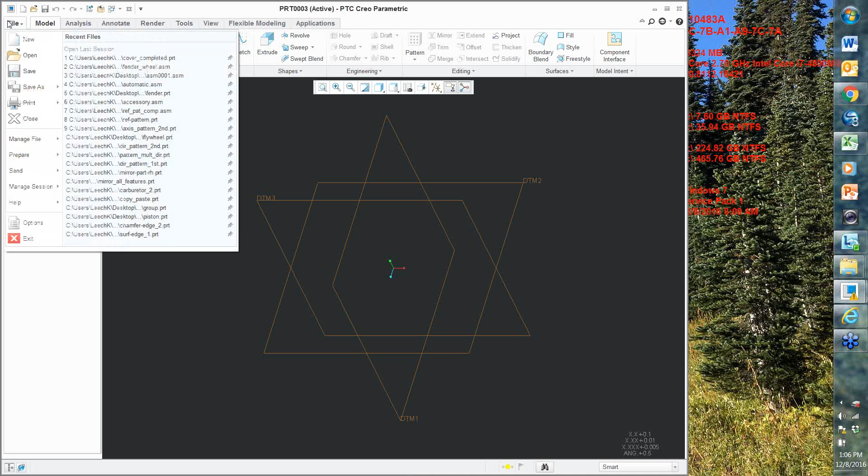So this is Creo 3. It's obviously an extra extension, one of the licensings that some companies will have or won't have. So I'm just going to start a brand new part here.

And I'm going to go about doing a cover. A lot of times with surfacing, you'll get an artist view of something or a JPEG. So I'm going to build this around some JPEGs on the premise that maybe somebody sent me these and said, hey, I need a cover to work towards this. And my job is to build that cover.

So I know that the cover is going to be 10 by a certain distance long, and I might want to even set up a little sketch in the background to give me some reference to some of these numbers. So I'm going to build a 10 by something here, rectangle. I did that kind of quick. I should have been able to get that symmetric, and I didn't. Big deal.

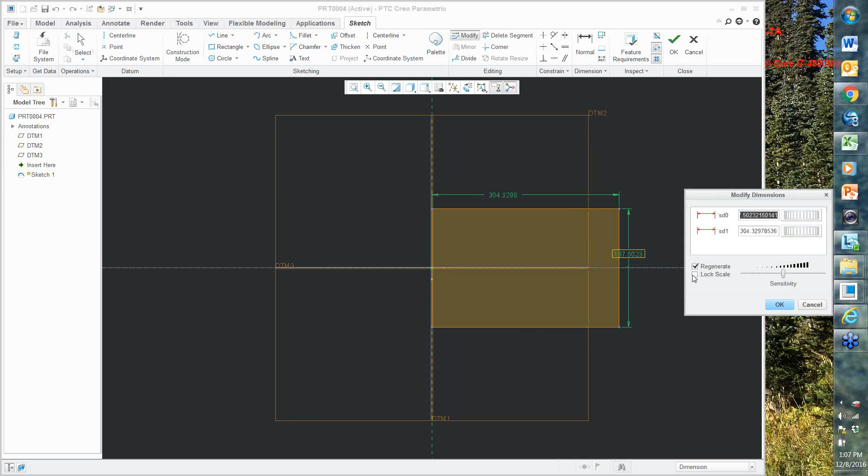Make that like 7 and 10. And I'm working in English units, in case you're interested. So I just got a little box for myself to get started here. I'm going to bring in those JPEGs. They're sitting in my directory. I got a couple JPEGs that somebody sent over that I'm going to build a cover around. That's why I put the grid there, so I have some reference to get a feel for how big this cover is going to be.

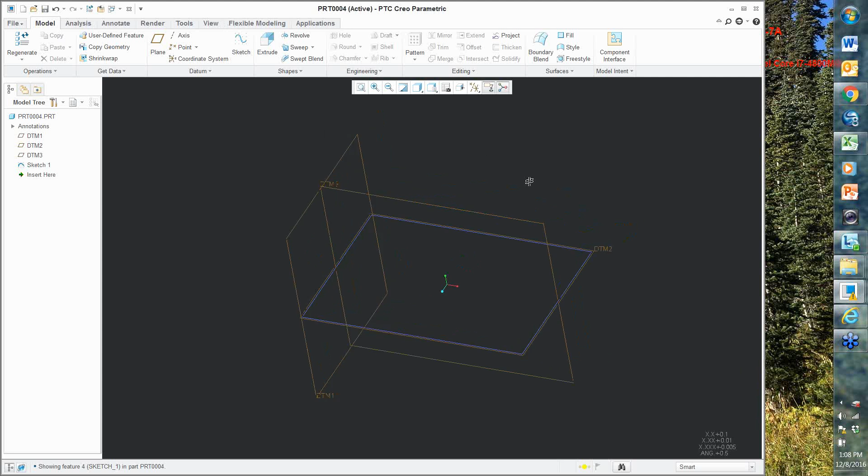And then the second part of this would be to build a cover for the backside off of the first cover. But today we're just going to do the first one. A couple versions ago, ISDX was the only way to bring in images other than putting them on a surface and applying them as a surface. In Creo, I'm not sure if it was 2 or 3, I think it was 2, they changed that and moved the images out of ISDX. It actually allows you to add those images in just a base unit of Creo.

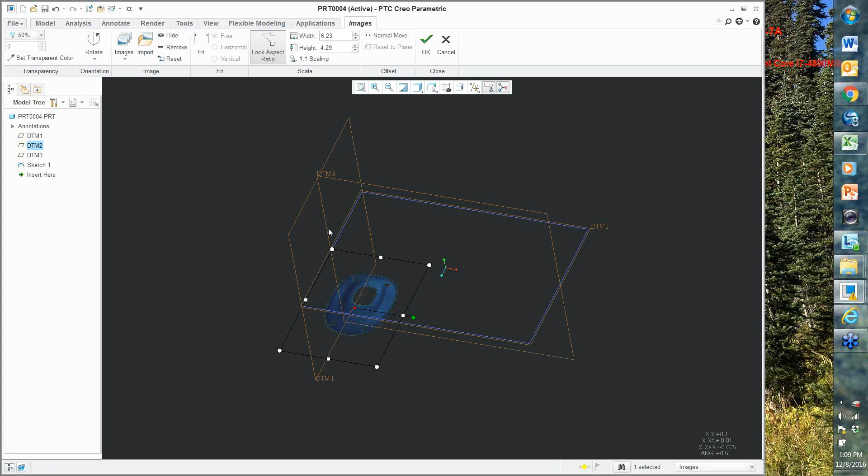So we're going to bring that in. I'm going to put an image on the front view. It's looking in my graphics library, which is not where those views are. They're actually in my working directory. I'm going to bring it in and start working on this. Again, I put the sketch in there to give me some reference. I'm going to bring this up and split this down the datum. So I'm going to rotate it. I wanted to go the other way, actually, so let's go left twice.

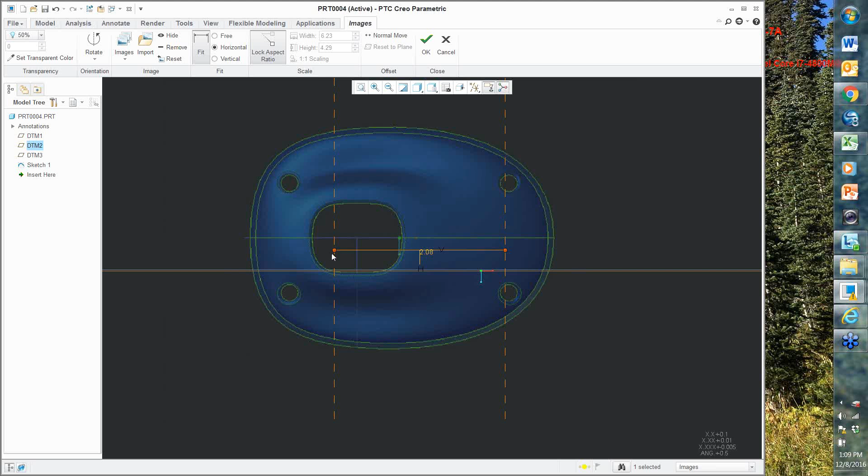I want to make this thing 10 long, and one of the things I came across a while ago is that you can actually go in here and say, I want to take this out, drag it out to here, drag it out to there, and I want this to be 10. Because that's what my grid was. I put the grid in at 10. This allows me to scale my image and get me started. All I had to do was uncheck that. I'm going to lay it inside my grid. That's a start. I'm in the center there. Not too bad. Good enough.

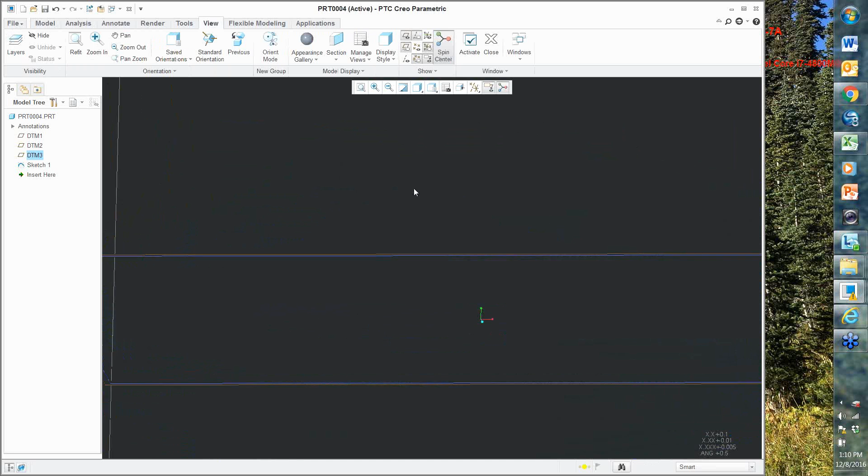Add another image. You can add more than one image at a time. So I'm going to import the second image here and put it on the middle datum. Working directory, that would probably be my left view. Go to the left side here. Front view. Talking and thinking is not my strong suit. Actually, that's the front view. That's the wrong image there.

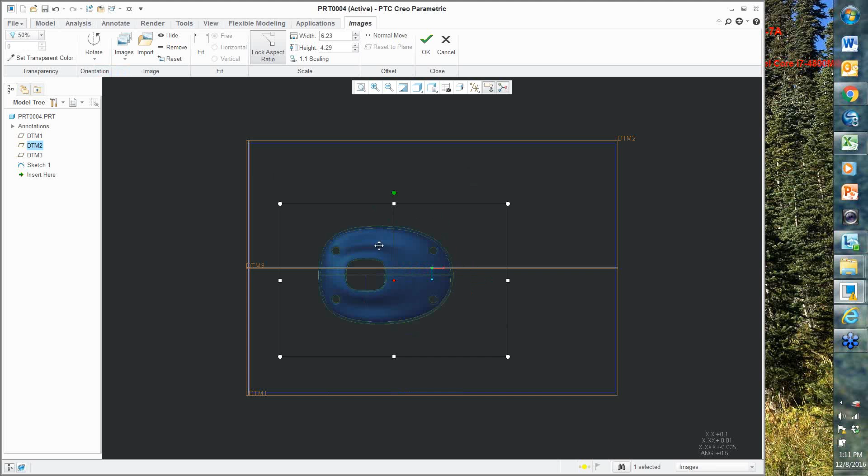Do that again. Display images. Import. I think I lost the original one too. I just bailed out of that. My bad. Working directory, top view. Just in case you missed it the first time, I get to do it again. Close. Good enough. Import.

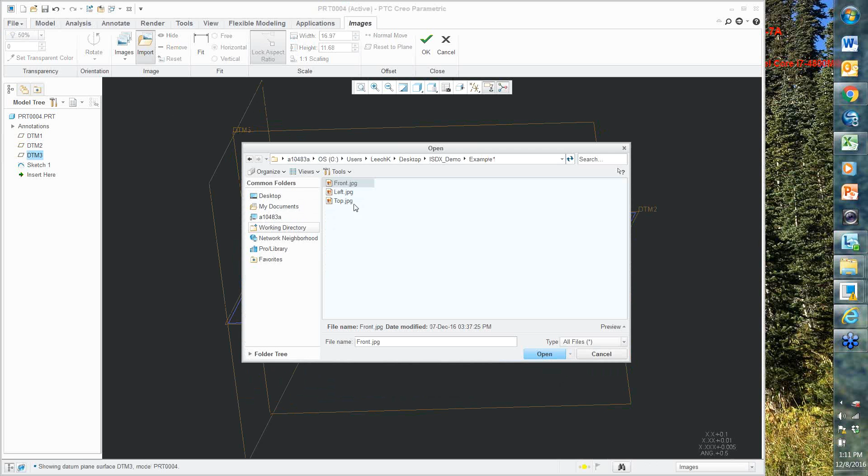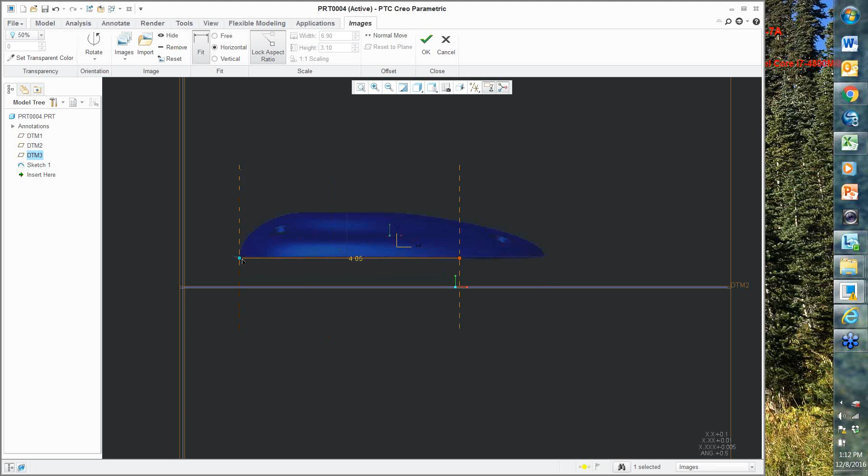This view. Working directory. Which one is which? Yep, that's the one I want. That's the better one. Front view. Bring that down. It's the same thing. I want to get distance here, and these are just going to be guides. I'm going to work my curves around them and play around a little bit. So I'm not looking for absolutes. I might be building the second half of this cover off of the first half, so this is just the starting point.

And that's not too bad. So I just brought in some sketches that I'm going to work around to kind of build my part. So that's not part of style, that's part of everything, and I could go and build solid models off of these sketches too. So you can use the sketch technique regardless of whether you're doing ISDX or surface modeling or solid modeling, it doesn't matter. But we're going to do some ISDX.

So this style feature, and I also find this too, when I go out and visit customers a lot of times, they're not even sure if they have ISDX, but if you click on the style feature and it doesn't tell you to go see your sales guy, then you've got the license. So sometimes it's been built into some packages and it's available and maybe you just didn't know it.

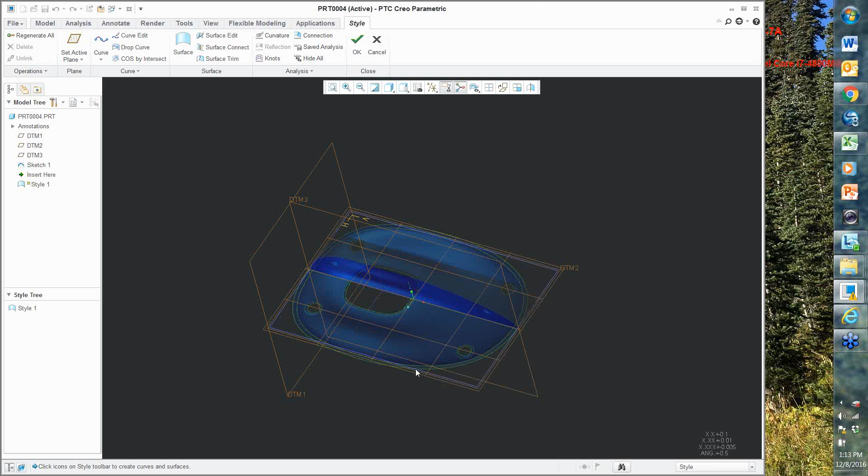So style, what's nice about style is that you can build your boundary curves and your surfaces all within a feature. And the typical thing within surface modeling is your model tree can get really crazy. So this surface technique style brings some of that together, gets a little more organization to your model tree. It gives you some extra tools that you might not have had, like the ability to work multiple screens at the same time. You can orient the models, so you can look at them in different views at the same time.

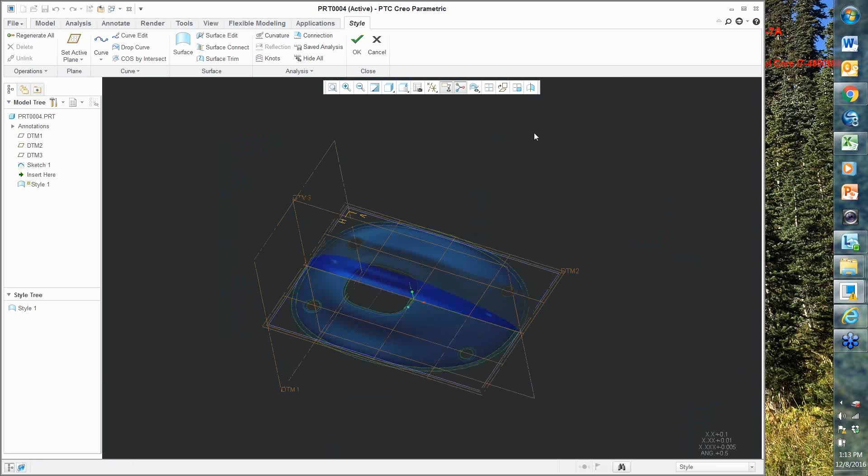I work on a laptop all day, so I tend not to do this multi-view thing because I got limited space anyway. But it's just a click of the window, and you can do a couple other things with that, but I tend not to do a bunch of it. So I'm going to start working on my curves first, right? Typical surface modeling, got to build the curves. So I'm going to build the curve around the bottom and some other curves.

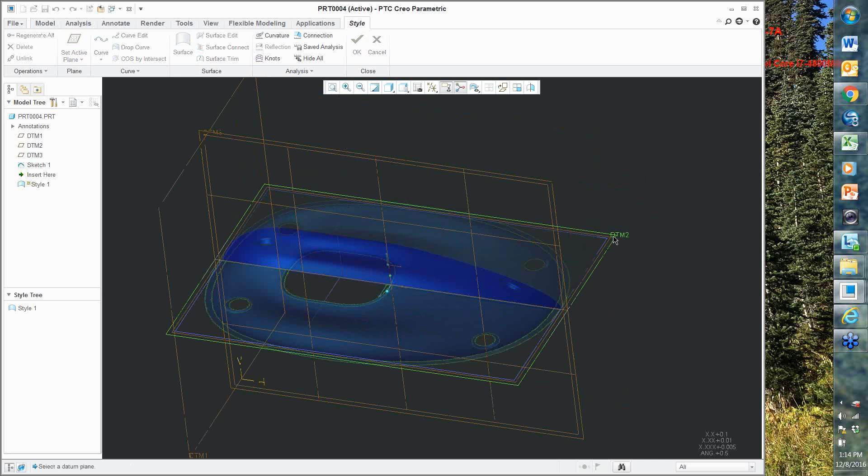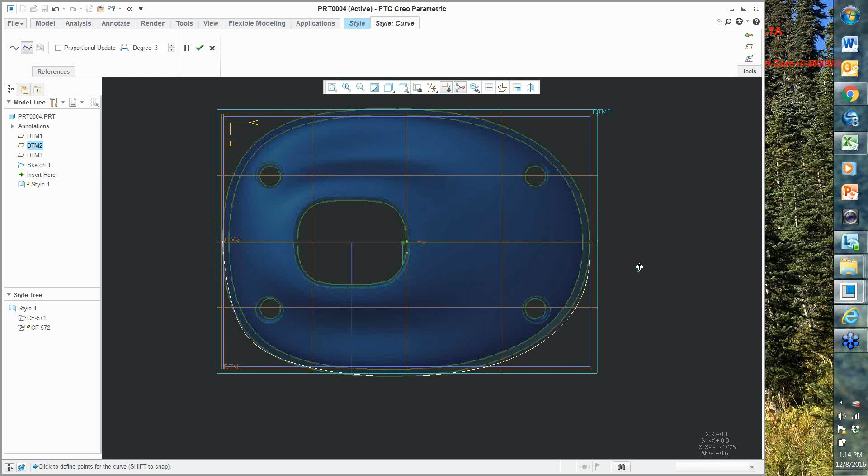You have to set your active plane, so one of the clicks here is active plane orientation. Well, I actually have the active plane set correctly, so I was kind of skipping that step, but basically it's just set it, pick the datum you want, right click active plane orientation, start building a curve. Right, a free curve or a curve tied to the plane is what I'm looking for. So I'm going to build a plane curve and just shift, grab the datum, and I'm building splines around this shape.

So once I get done with that curve, I can go back and double click on it and I can adjust it. And I didn't quite get that datum that I wanted, so I'm going to use the shift again and re-grab the datum. Drag it out. I have a little handle here that allows me to make that endpoint normal or whatever I want. So I actually want that to be normal to the datum. And I want the other datum here to be normal. Keep going back in there because I didn't really like the look of that.

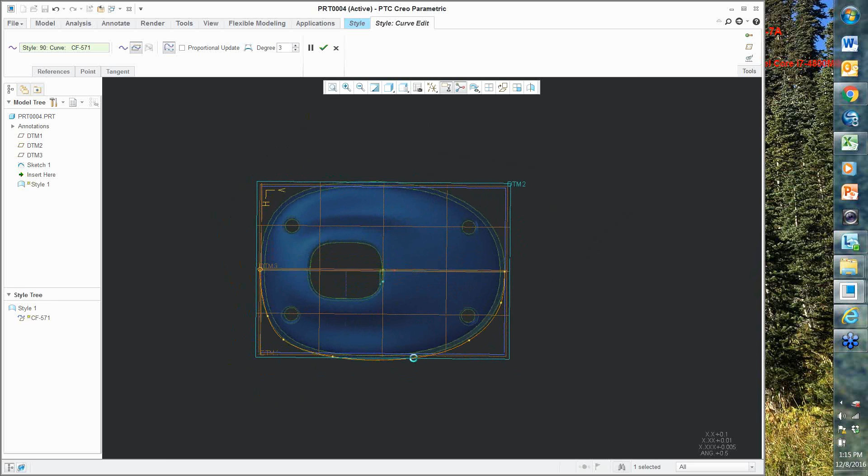You got to be careful too. I was playing a little bit earlier, so I've actually offset that by accident. It's just a matter of bringing that back down to 0. So we'll talk about that offset in a second because I will offset. Back to my orientation here, kind of clean my curve up, like that one. That's not too bad. I'm okay. I also want a curve in this to represent this top lip.

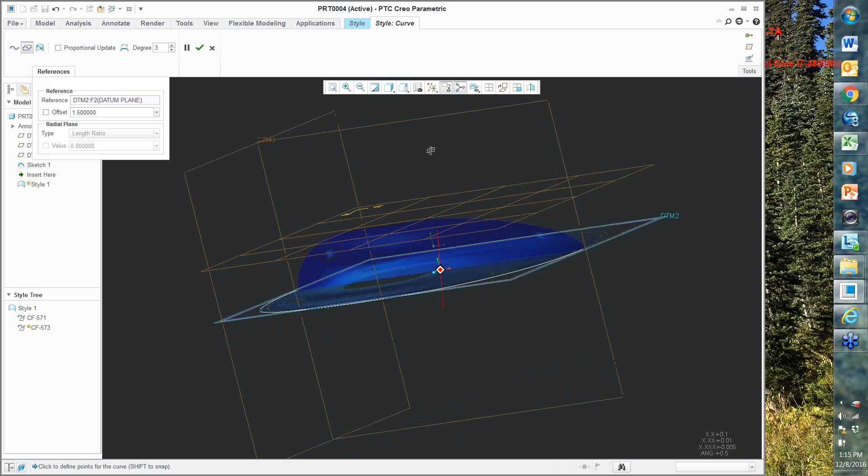So I'm going to make another one. But this is one I'm going to actually offset. This is, I don't know, like 1.5, pretty close, looks okay. Go back, reset my orientation, and draw the second curve here. So I'm going to build another curve by grabbing the datum again. I wanted to get a little bit closer, left click, click, shift.

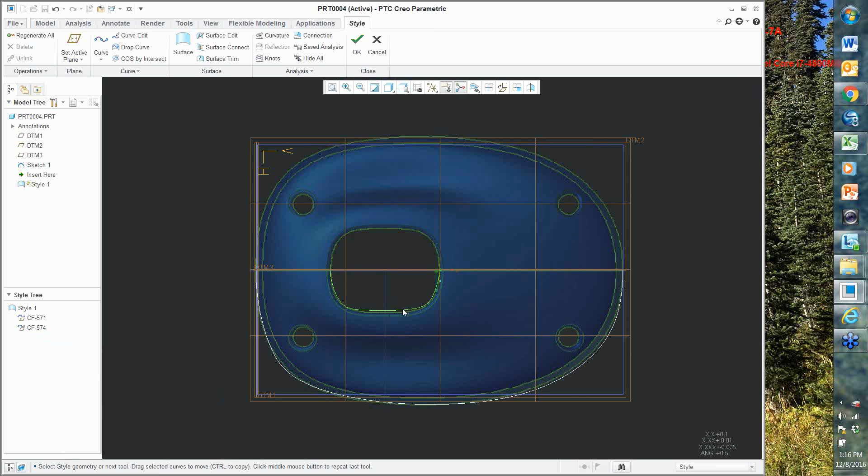Be done. I finished the second curve, go back in by right click and edit definition, or you can just simply come in here and double click on it, and then you can move your points, mess with your endpoint condition, make that one normal, this one normal, and I didn't finish that. You're going to go normal and then grab the datum. Do that again. Normal and grab the datum. All right. Bring that out. A little bit tighter here and clean it up.

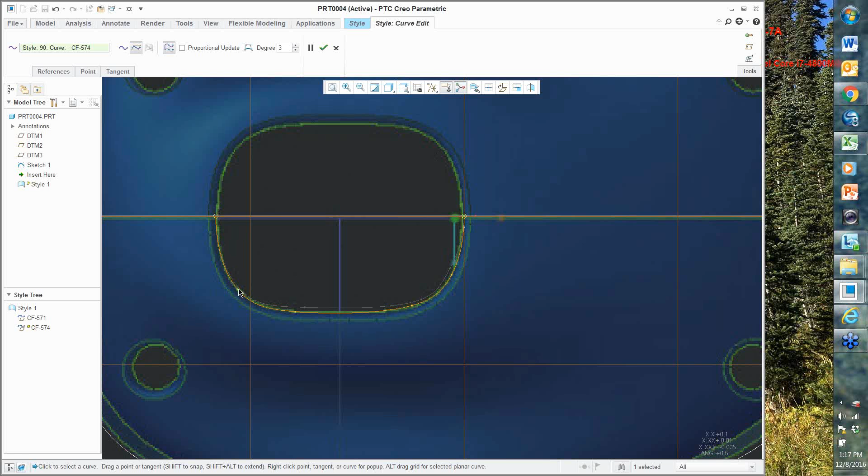So I like that. So I got two curves. I'm going to build side curves, and then I'll build a surface and then work off of the surface to build the second surface and thicken. And you kind of get the idea here.

So we're going to change the active plane. So we're going to set active plane to this datum. Now again, I offset that curve without actually building in a second datum. So it kind of saved me a step in there just by offsetting it. I could have built another datum and reset the active plane, but again, just little quick tips to make it a little bit easier.

What did I do? I started talking. I wasn't watching. I don't want to cancel. There we go. For some reason, I lost my active window there and got ahead of myself.

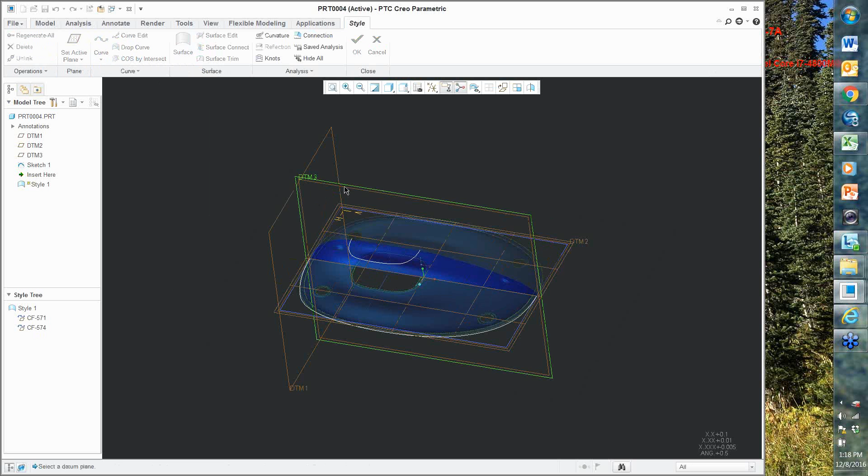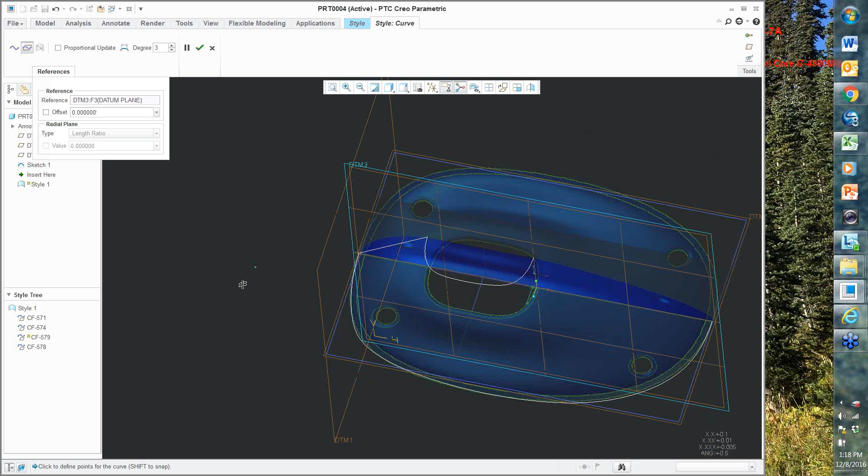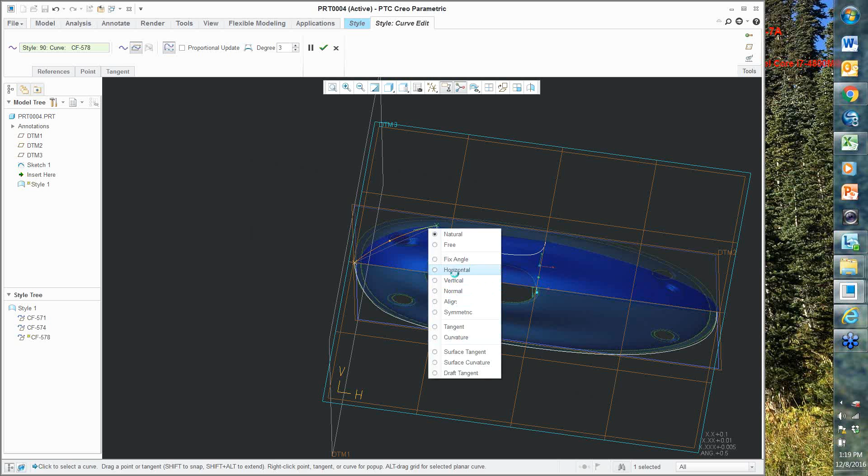I can go back into that curve. I can add a point by right-clicking on it and add a point or a midpoint. Right. I can control the ends here. So this would be horizontal. This side would be tangent.

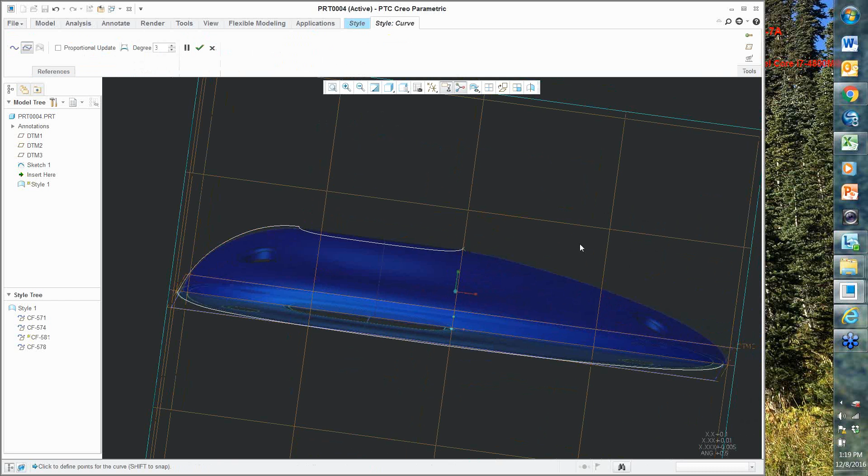You can drag them, you can manipulate them and move them, do pretty much anything you want there. Again, I'm kind of using that sketch in the background to kind of get a feel for that. Build my last curve. Make sure I get the active one to work. Stop the curve. Shift. That's going all the way to the wrong end here. Let me try this.

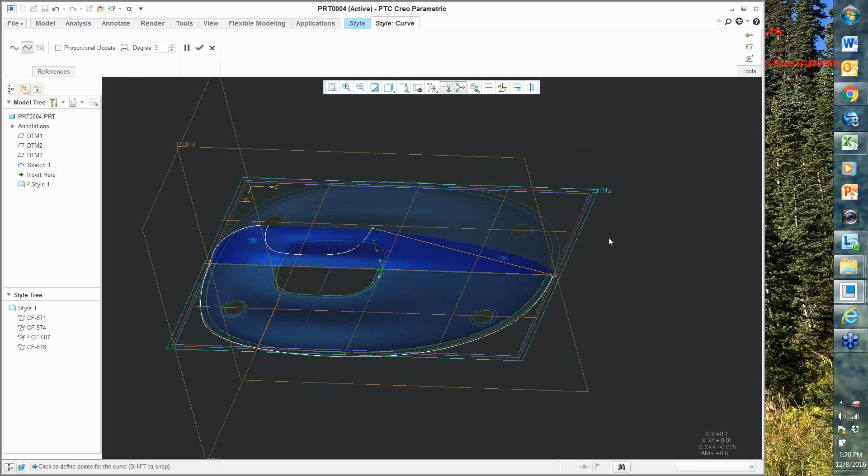What am I doing wrong? Pause for a second. There we go. I don't know what I was grabbing there. I was doing the same picks. I don't know if there's something with this GoToMeeting or not. But video cards, if anybody's familiar with Pro, video cards and these extra apps like GoToMeeting and things create some weird conditions. I don't really know what happened.

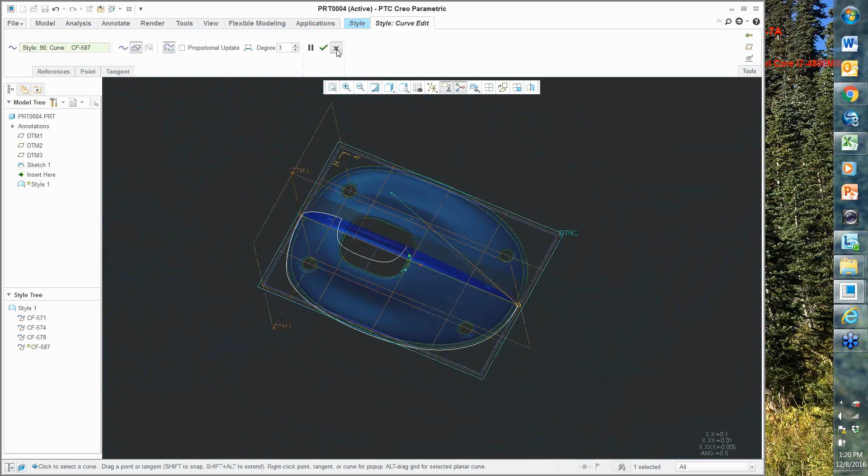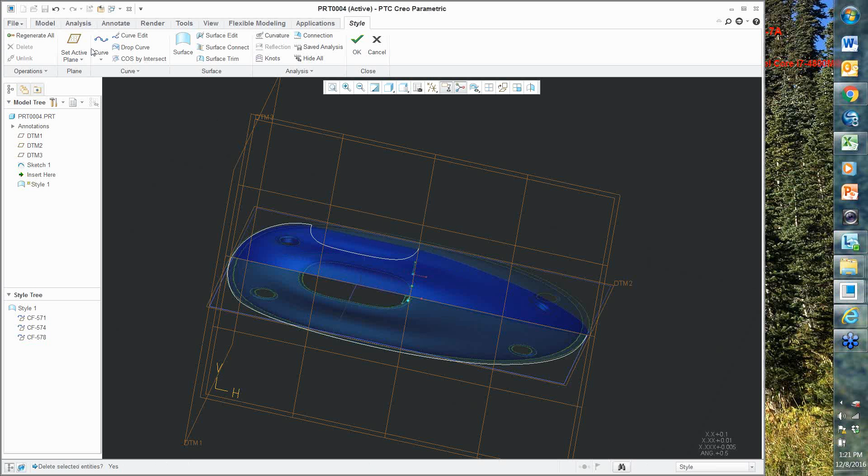Oh, I'm not even on that. That's what the problem is. So active plane. I'm going to lose my mind. At this point, I would normally probably go and restart my computer because I'm starting to get aggravated.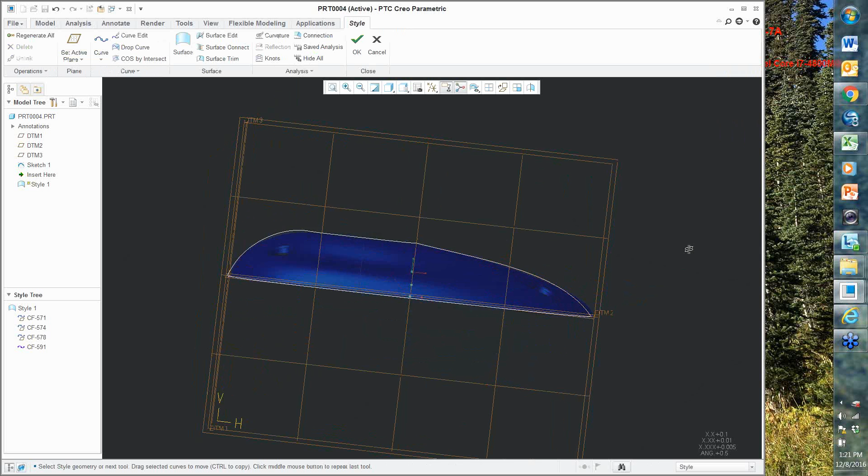Let's see if we can get a surface here, just to get an idea. So you can see I built 4 curves. I had to cheat the last one because, for some reason, it was going to the wrong end. Not exactly sure what's going on there, but let's see if I can get a surface. So there's my surface, and I'm thinking to myself, I probably should have put some side condition into this.

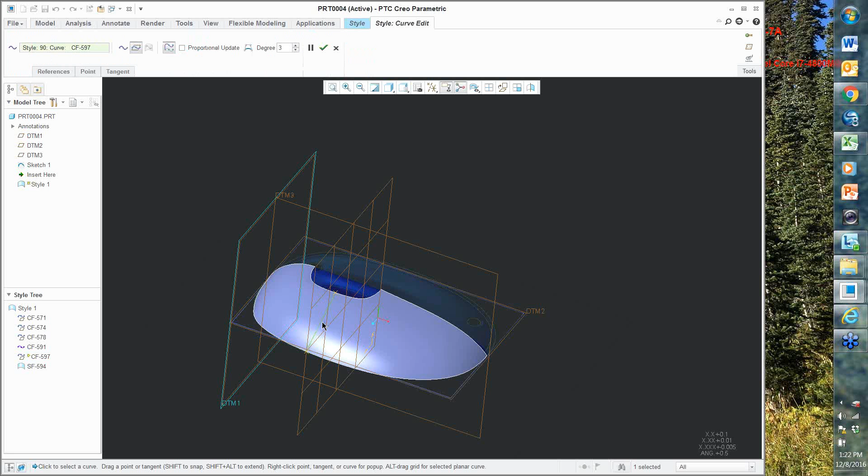So I'm going to reset active plane to this one, build a curve. I'm going to offset this curve somewhere, I don't know, 3.5. Go back, redefine my surface, add an internal curve to that, and it tied onto the surface. And then again, if you go back in, now you'll see that the surface is reacting to my little cross there. Right?

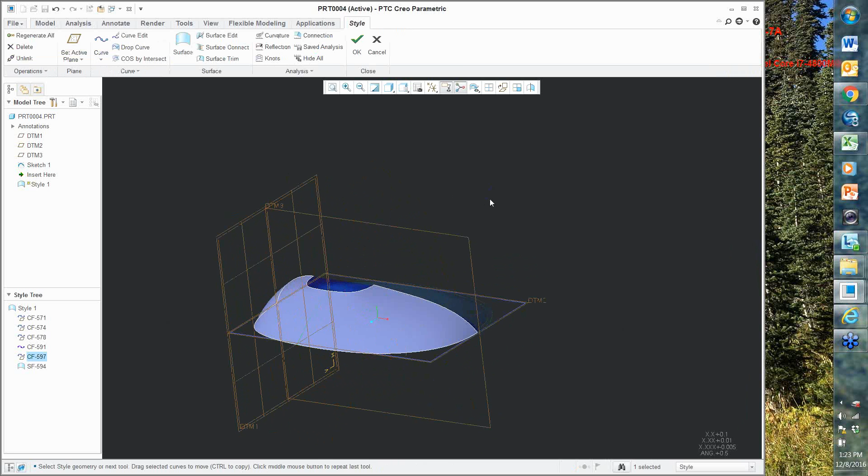And that would be the beginning. And you would take that and you would mirror it to the other side and thicken it. And so I got one that's already a step ahead because I got that free curve in there. I don't really want to try to mirror that. So let me mirror this other one here I had a little more time playing around with. Same concept, same curves, except this one I worked fine with the plane and I got the surface.

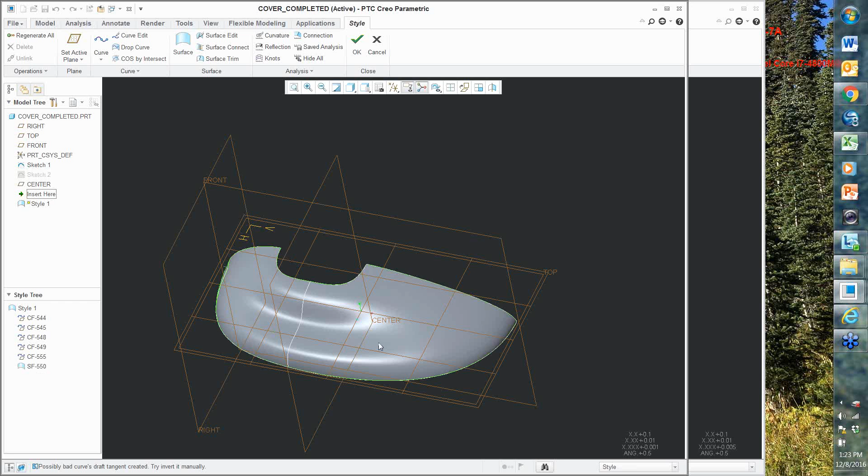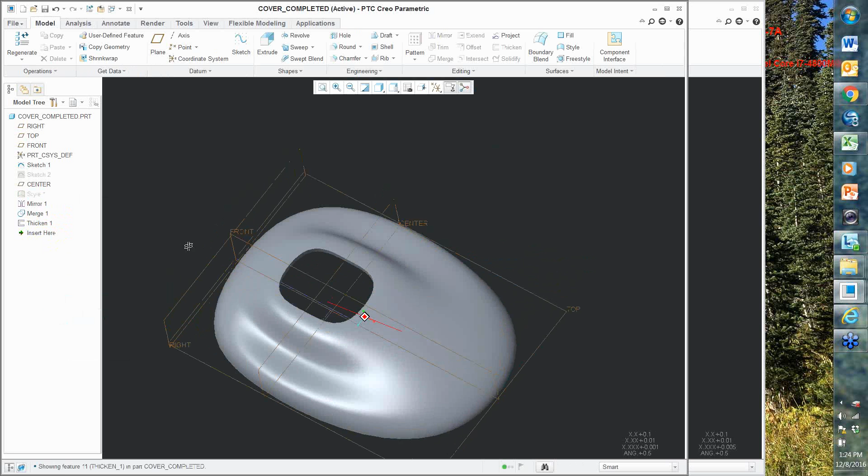Take the surface, mirror it to the other side. Take the 2 surfaces, merge them. Take that and thicken, whatever distance. Hide the style tool. And there's your beginning shape of your cover. Take a look at the surface. All right, so you're getting a really high-end surface there.

So that was just kind of a quick one; like I said, I had a couple issues there. I don't know, it was grabbing opposite of where I was picking. But that was the first little group that I wanted to do. The second one was the motorcycle example.

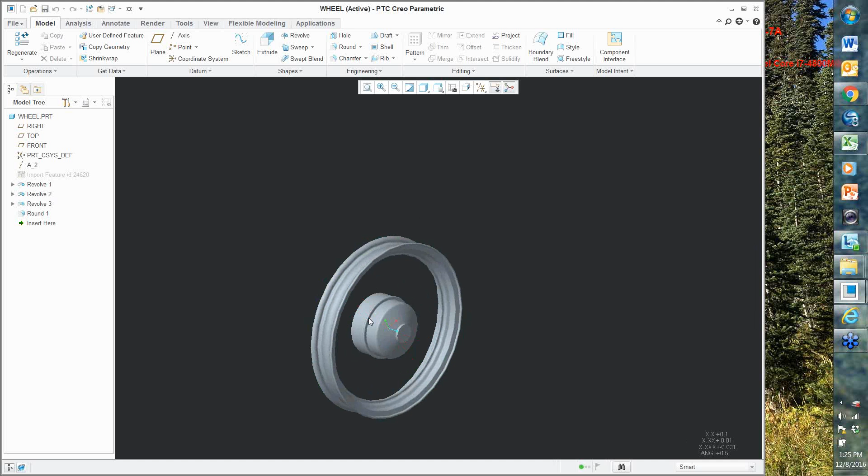So we have an assembly with some imported parts here, and we're going to build a fender, and we're going to build a set of spokes, just because they seem like kind of fun. So we'll do the wheel first. So how does ISDX come into a wheel manufacturing thing? Well, you can build the spokes very quickly. Same concept, using style. We can build a surface internal and pattern it around the hub there.

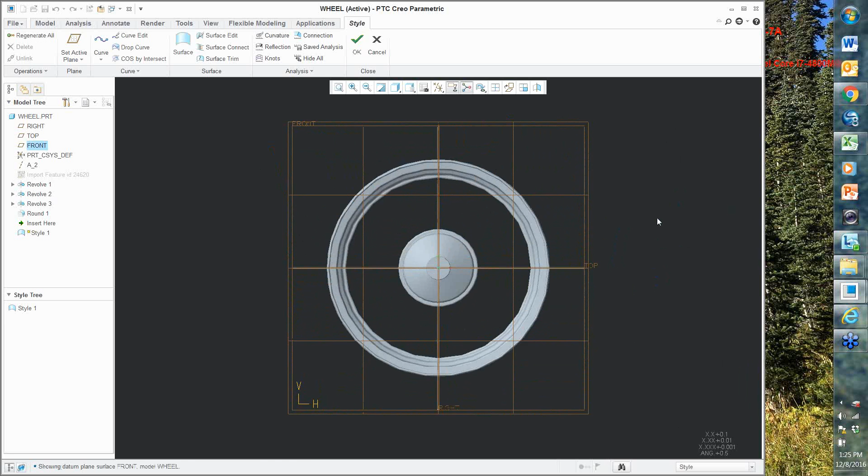So turn the datums on here. Let's go into the style tool. Set the active plane to be the front plane. Active plane orientation. We're going to go in and we're going to build some curves. Make sure we're at 0.

And we're just going to build a curve. We're going to start in here, and we're going to end up out there. We're going to build 4 like that. So curve, start here, end up there. So 4 separate curves.

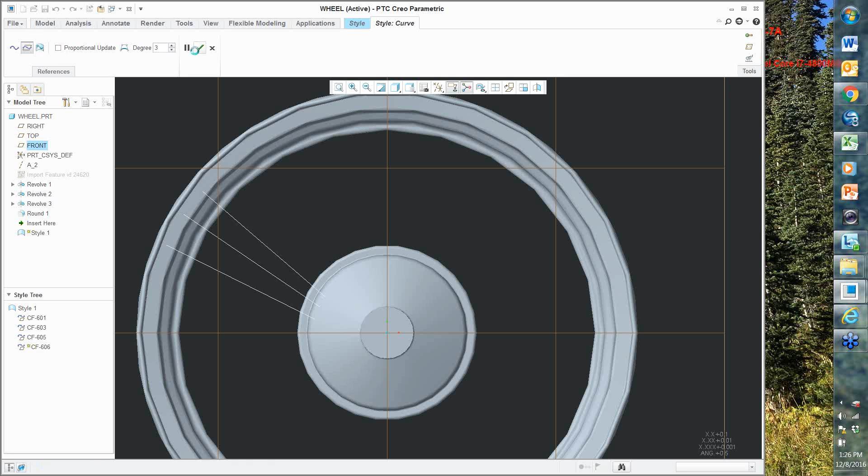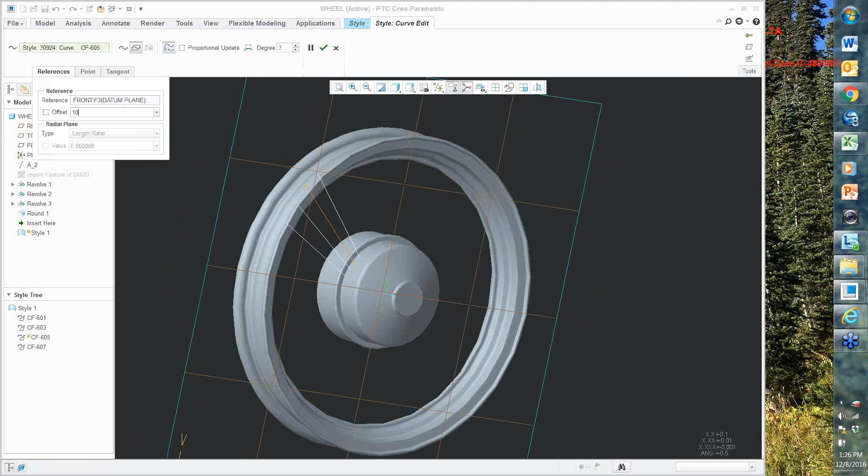They're all on that same plane, but I can go back. I can go back into those, and I can just offset them now that I put it in there. So I can go 10 to the front, right? So it's going to offset 10 one way. Grab the other curve, and we can go 10 the other way, so minus 10. So we built them all on one plane, didn't have to build a bunch of planes.

We can use them to build a surface. Control button. A nice little surface in there. And then we can use that surface to thicken. Didn't like it, a little too tight. Delete that and do it again.

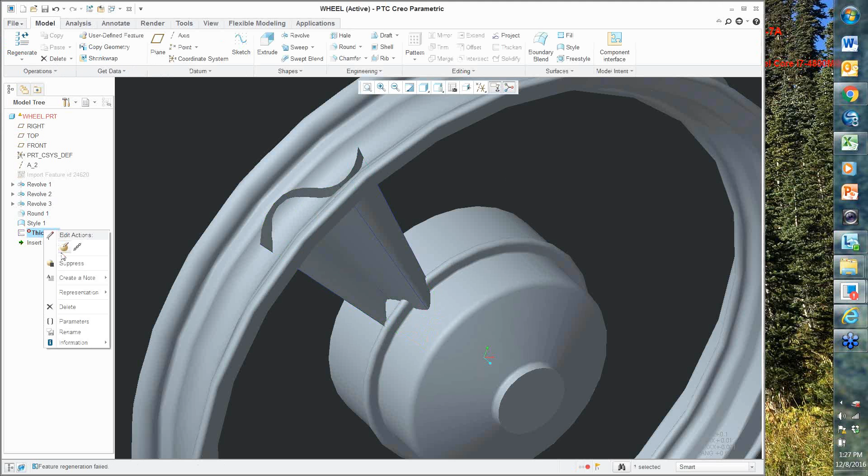Also want to add some style to this as well, right? So it came in as flat blades, but let's see if we can add a little style to these. We're going to drag these down a little bit more too. So I'm just double clicking on them to activate them. Definitely get a little bit of an overbuild here.

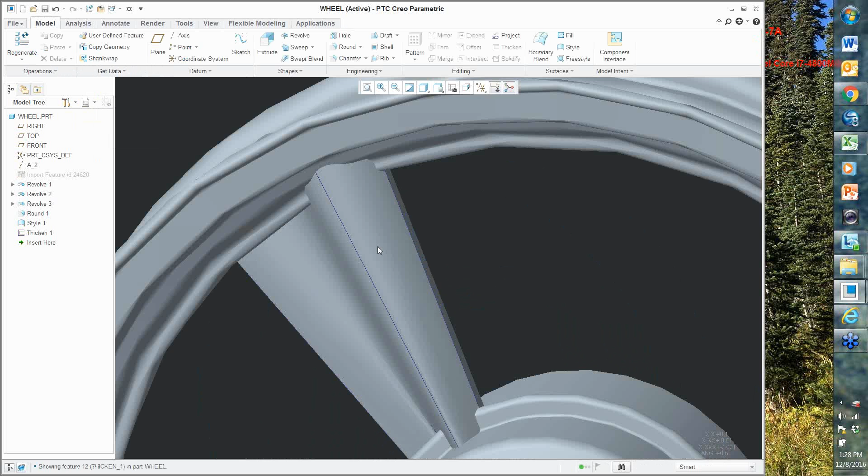So I'm just trying to get a style, so I'm not too worried about control fit or automatic fit in the thicken part there. So cheat a little bit. But we can go back into this. One of the reasons why I did it this way in the first place is it really gets you the ability to say, you know what, I'm going to have a midpoint, and I'm going to give it a little bit of a curve. And the midpoint.

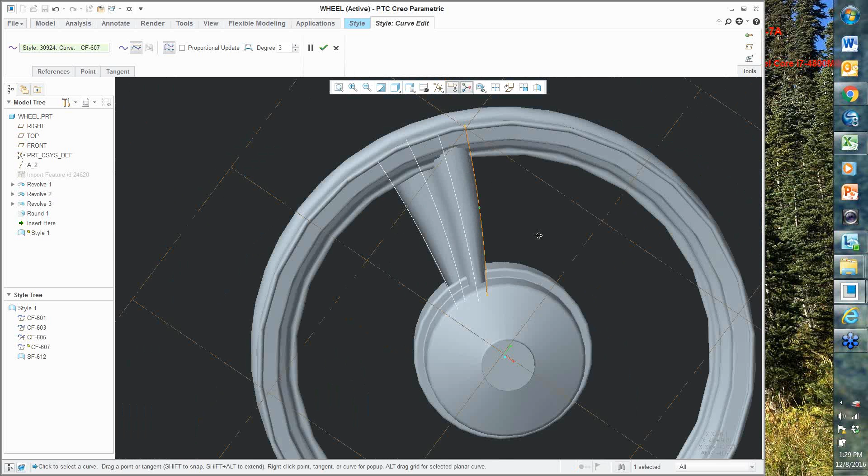And, you know, maybe it needs more. So maybe you want to pull it out even a little bit more. So there's our custom blade now.

What we can do is, the way we made this rim was, if I back up and show you, it's basically just the shape, the outside shape, the hub, and then a cut to remove that. So if I take the cut and I bring it down, the round's probably going to fail on me. We'll see here. Let's get rid of that round. And just take the cut and bring it down below the thicken, it'll wipe out that. And then I have to go back and redo my rounds.

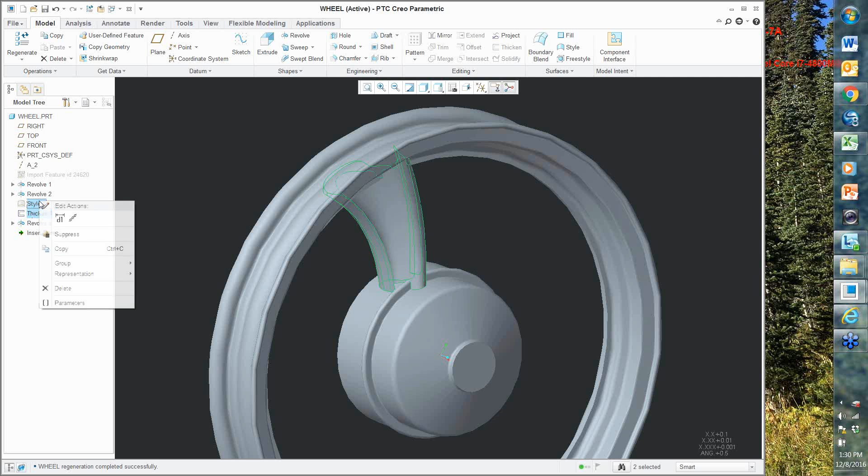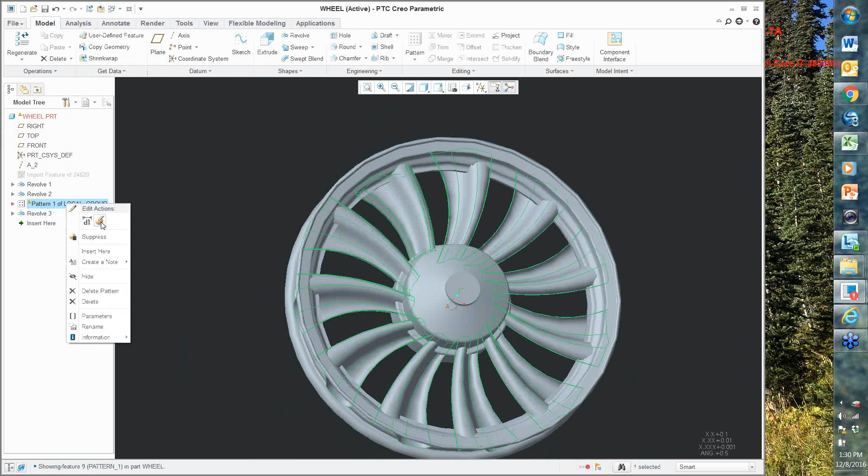Hide the style, right? So I get rid of little blue curves there. Group them. So let's say we want an axis pattern. Automatically divide by 360, give it some crazy number. 11 might be too many, too much. Let's go back and make that 9. Didn't want to delete the whole thing, just delete the pattern. Figure out what my problem is here.

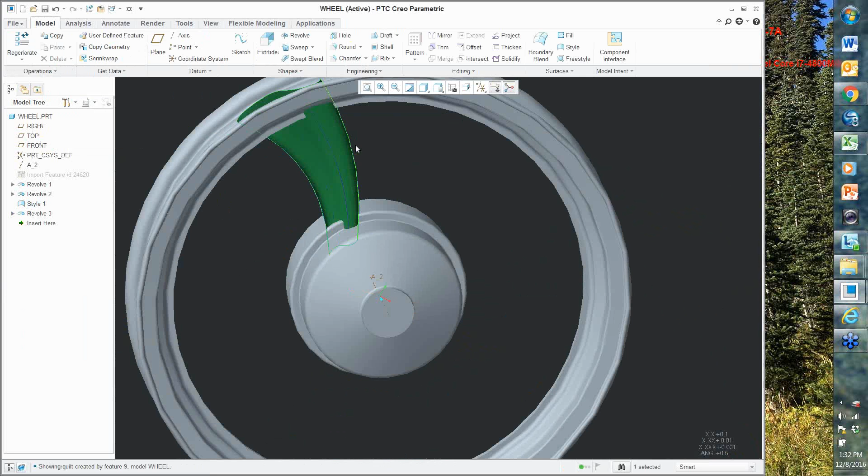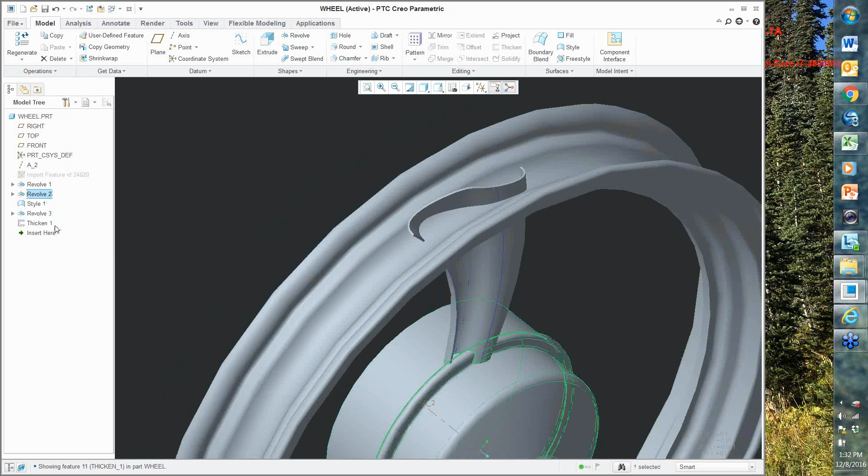So I've been fighting with this. Let me see if I can, -5. Make this a little bit less. Not quite as dramatic. And I lost my cut. I didn't. Check that guy down below the thicken. Hide the style. And let's see if we can pattern that guy again.

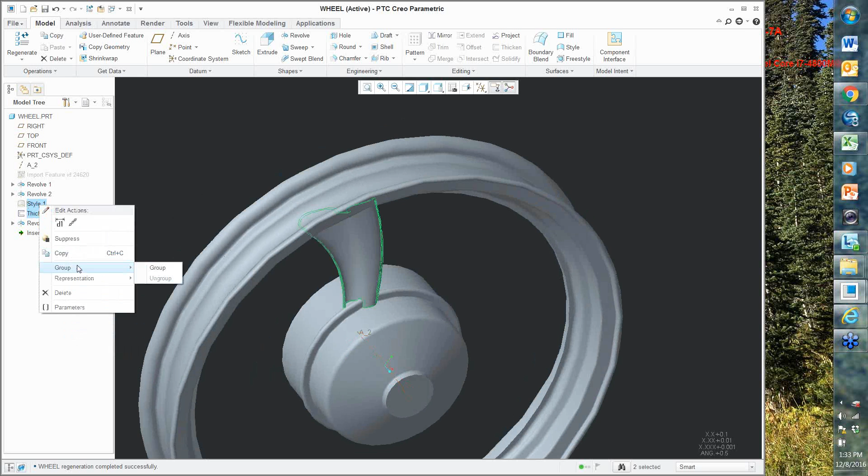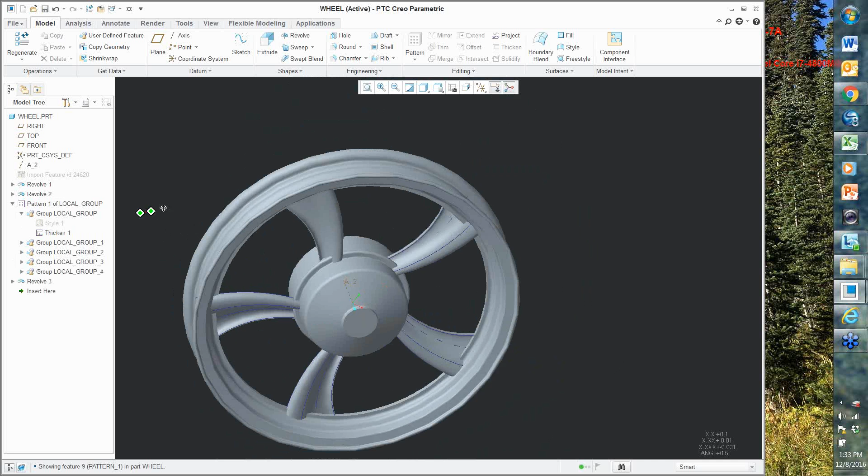And there we go, right? So now we're getting somewhere. So I got a little carried away with the curve and pulled it around a little bit too much, but that's all part of that whole design concept. Sometimes you got to go back and clean stuff up. Let's give that some color. Give that a pretty color.

Down here. And we're going to build the fender. So I'm going to build the fender the same way with a style tool. So these are just empty. And I can import in the side view of that. Start the style tool. Set the active plane. Grab the datum plane. Active plane orientation. And start building the fender. So curve. Make sure I'm not offset.

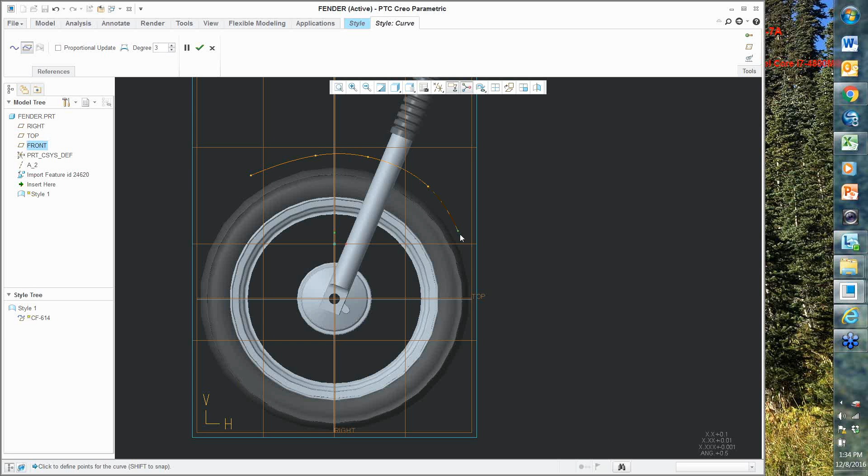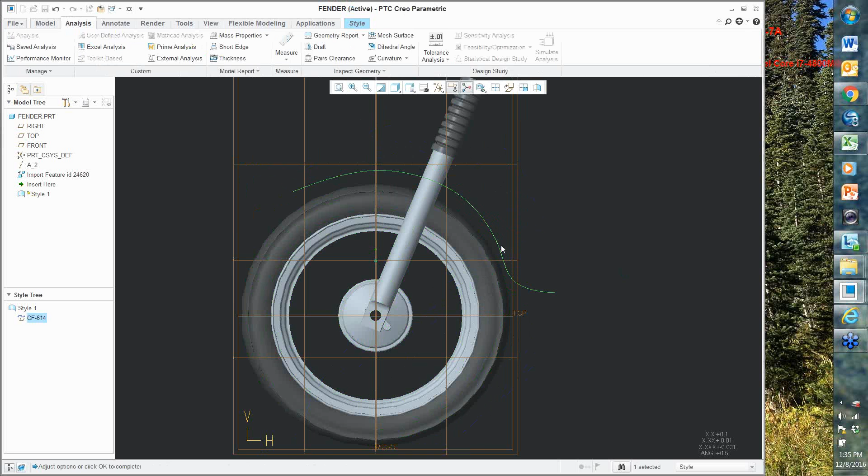Something like that. One of the things I didn't do on any of the other ones, you can actually do some analysis right on that curve. We do it this way too. We can just go up to curvature and kind of get a feel for the way that looks. And obviously I got an issue right on the bottom here. Click on that. You can always delete a point if you think the point is part of the problem. You can add the point back.

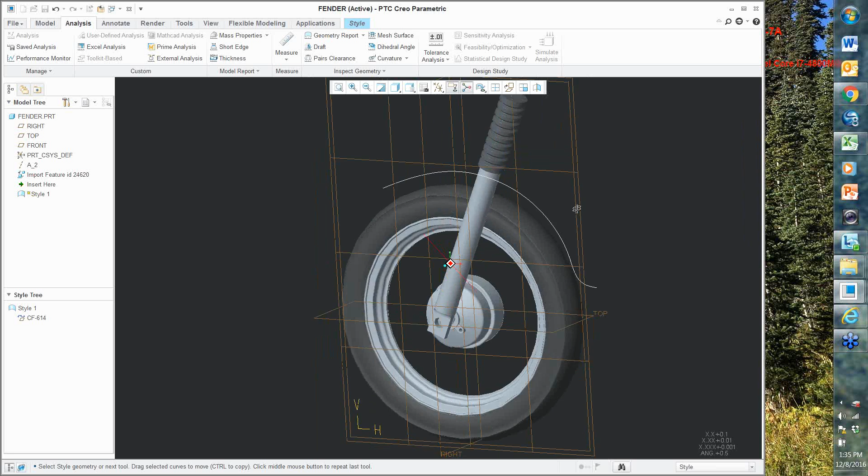What you got? Here's the first curve. I'm going to put a cross curve in here, so we're going to go set active plane to the center, put in a cross curve. Right to that. Let's get a side view of this. See what I'm doing. Couldn't really see what I was doing there, so let's do it again.

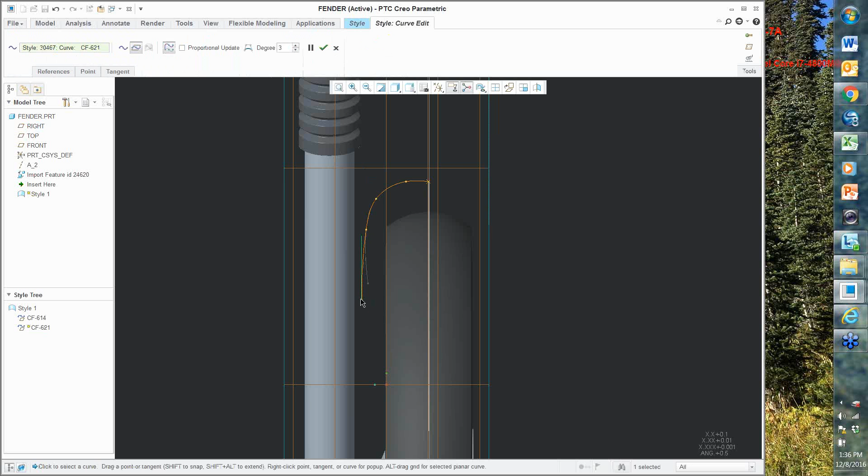That's enough information there to build a surface. Grab the curve I want to drive the surface along, grab the cross curve there to kind of give it the shape. The beginning of my fender, not quite what I was thinking, so what we're going to do is we're going to do a drop curve to cut away the bottom of this.

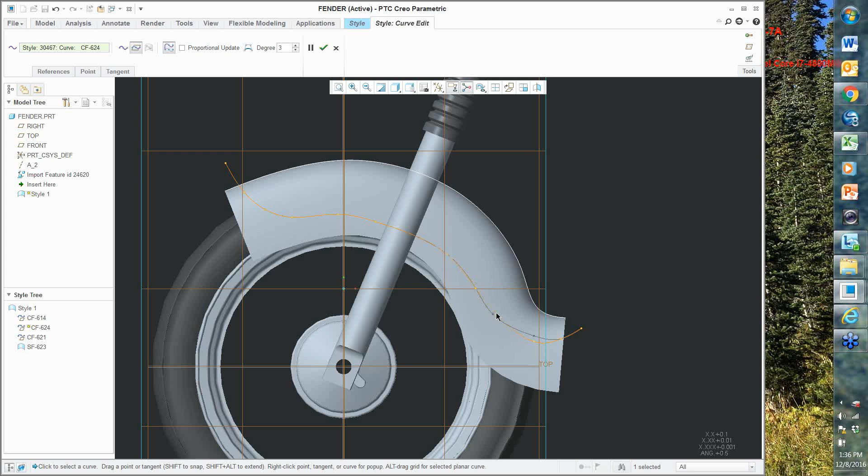Set active plane to here. Plane orientation. And we'll build a curve down the bottom. So I'm going to take something that comes in here and cuts away. That curve up a little bit. I don't really like the look of some of those, look kind of flat there. Looks good, but that's on that back plane.

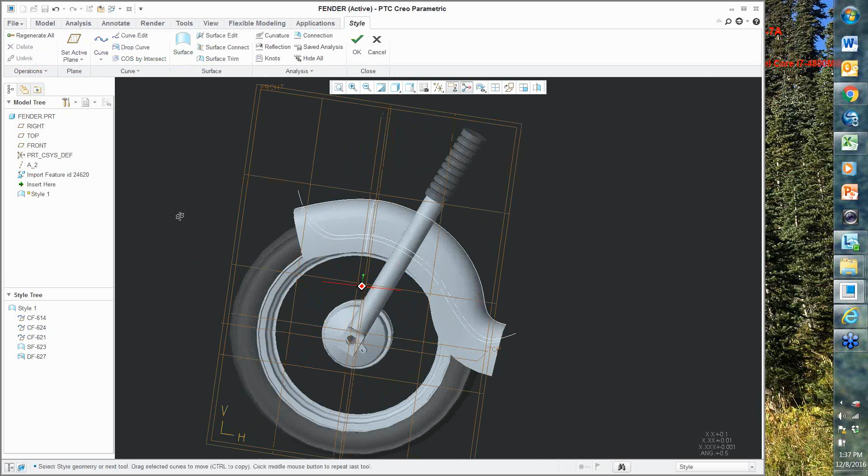So I have to do a technique called the drop curve, where you grab the curve, do a drop curve out onto the surface. And you can hide inside here too to make your life a little bit easier if you don't want to see things. I'm going to do a trim. Surface trim using that drop curve I just created. Grab the bottom to delete. There's my fender.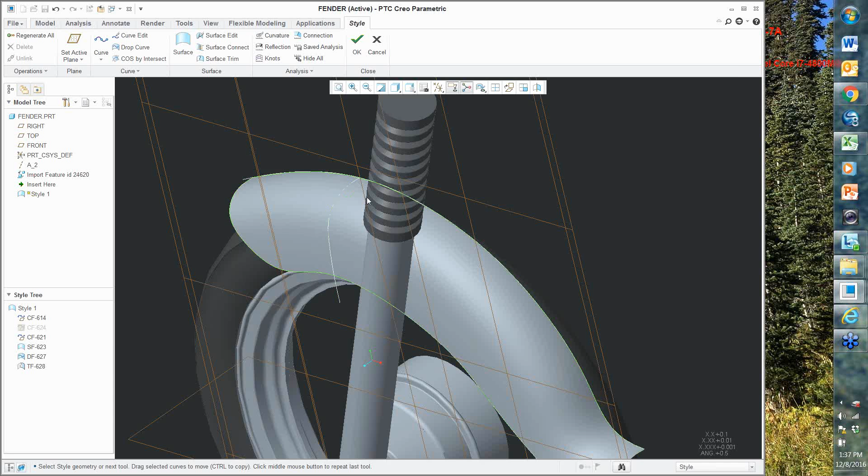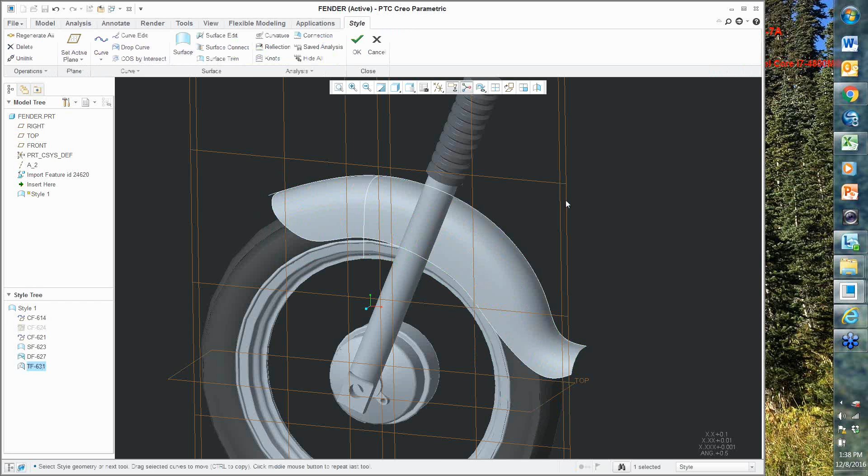I want to go back and make sure that I make this curve normal to that top surface. So I'm going to go back in here, pick that point, and make sure I make that normal to that. That way, when I go to mirror this, it'll make more sense. Drop curve, trim curve, surface, delete, bottom. There we go. Take this, mirror this to the other side. Merge them together.

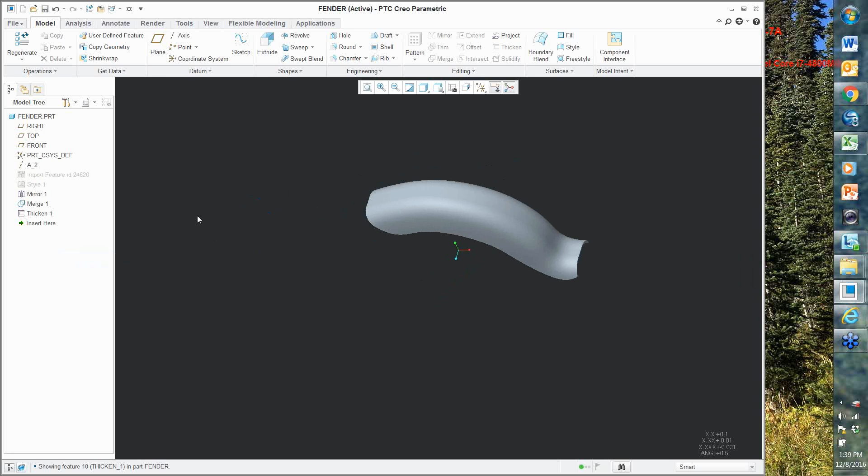Merge them. Thicken. Shape, hide style, hide the import. Don't really need that when I go back. Maybe add some color to this guy. My fender and my wheel.

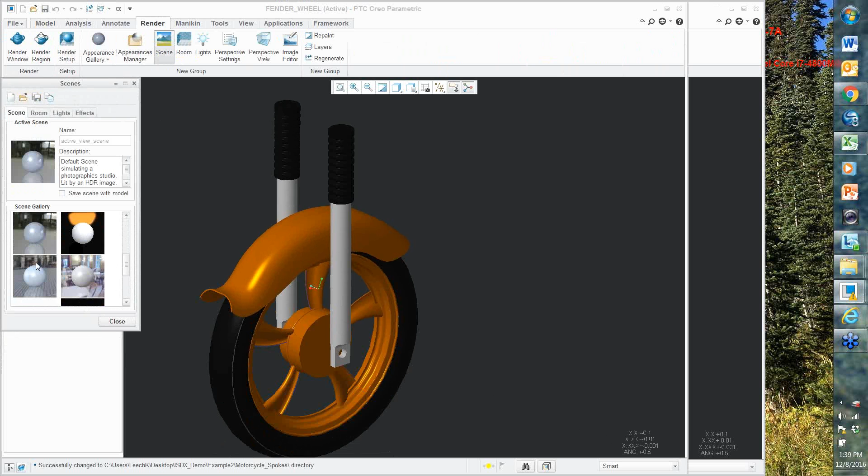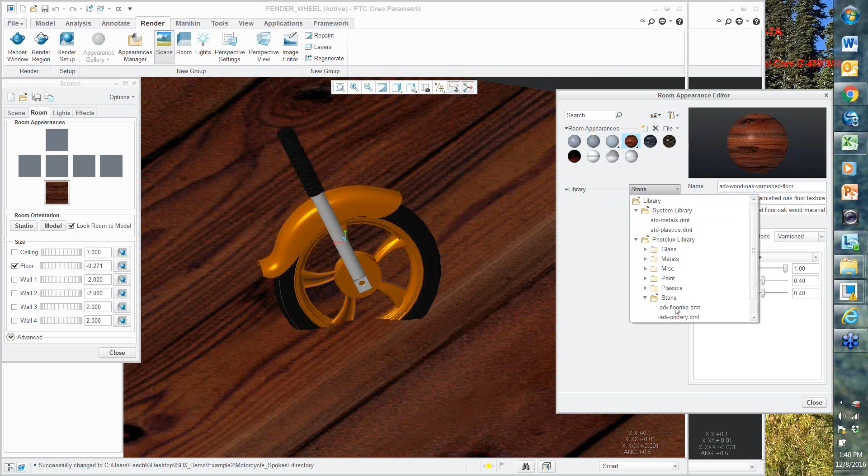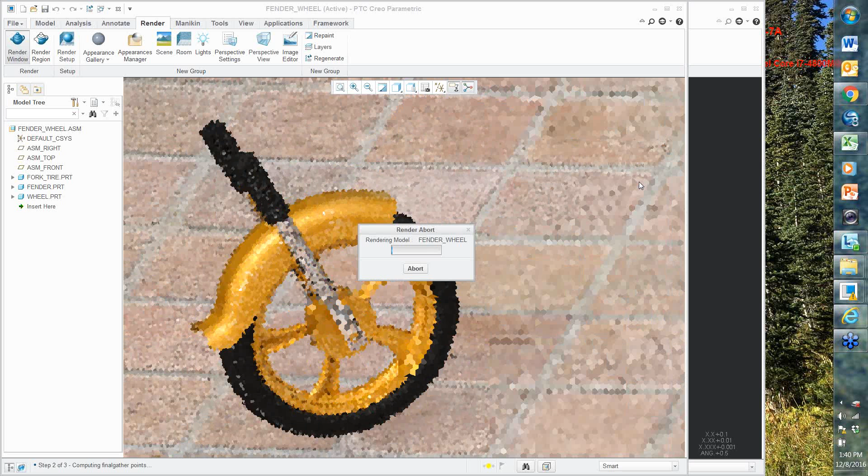Get over to render. Room. Just trying to find something that I like there that I can do a quick little render. Obviously, I don't want a wood background. I'll put something else in here, maybe some stone or something. Yeah, we'll leave it on brick. Make the floor go down a little bit. Leave it base. Find a window. There's a quick little motorcycle rim and fender.

And that's kind of where I was heading today. I'm hoping that you guys would get something out of this, even if it's just one little thing. If you've never seen ISDX, this is kind of the concepts. It's a very conceptual piece of software, more of an industrial designer kind of piece of the puzzle. The nice part is at the end of the day, you end up with Creo models, you end up with Creo solids.

You can kind of work within your assemblies. You can do a lot of those basic technique stuff with it. And it can be a mixture. It doesn't have to be just all ISDX. It can be some combination of solid modeling with ISDX. I'm getting better at it. I don't do it every day, so it's not something that I live and die with. But I definitely find advantages to doing some of that work with it.

Hey, Kevin, I'm going to let you stay the presenter because we do have some questions about what you're doing there. So just in case you can toggle in between answering the questions and showing things. One of the questions was, where did you get the original image from? You have that on your system, correct?

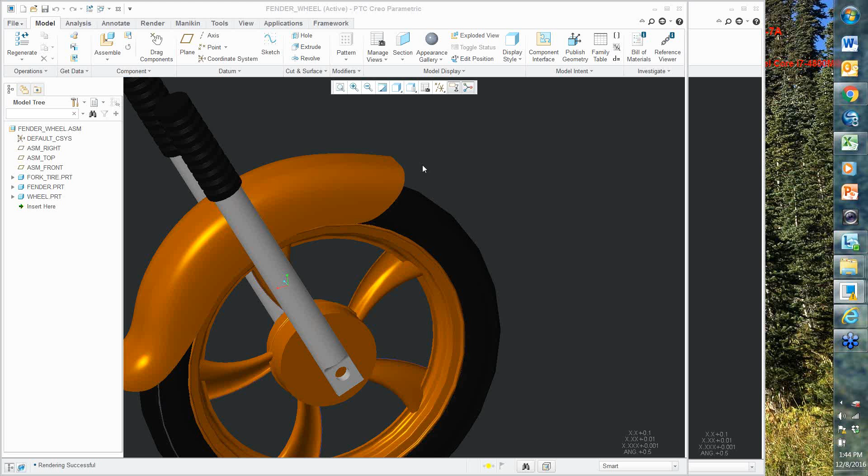Anything else? Let's see. Are the surfaces tangent across the mirror plane, or C2 continuous? They were tangent, but not C2, in the example of the cover, or in the tire fender. If I brought that fender back up, it's not C2, I don't think. So how would you make the surfaces C2? Is that what you just showed there?

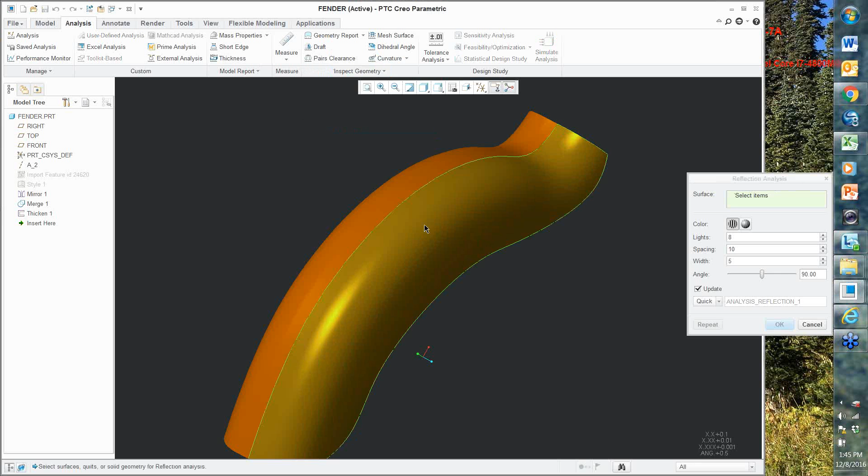Yeah, so they're tangent right across that, but that's not C2. To be honest, I don't really know the answer to the ISDX C2 thing — I'm still kind of getting there. I know that with regular Pro E surfaces, your curves have to be curvature continuous in order to get that C2 finish, but I don't know how I do it in ISDX at this moment.